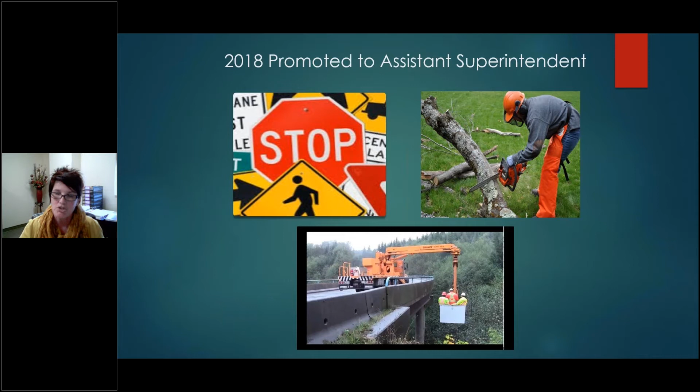I've got all of these departments, these organizations, these things that I need to do and I need to learn, but I don't know nothing about no stinking bridges, and I remember saying that. So what do I do? Where do I go? How do I find resources?

Which is exactly what Travis was talking to us about - how do we find those resources? And as you can tell, I'm not an engineer. I grew up through the ranks. I'm more of a communications and HR type person. Through fate, whatever you want to call it, I wound up at a county municipality and worked my way up into this position.

Well, there is a saving grace for me, and for me it was our lovely LTAP, our Indiana LTAP. I have to give Pat a lot of credit, and I have to give LTAP a lot of credit here. They actually took me under their wing, if you will, and tried to show me the ropes. One of the great things Pat did for me was he actually invited me to this lovely thing down in Florida.

Florida was the actual ploy for me. Hey, you want to go to Florida and learn about bridge preservation? Sign me up, Pat, I'm there. So for me, I got to go to this TSP2 National Bridge Preservation Conference.

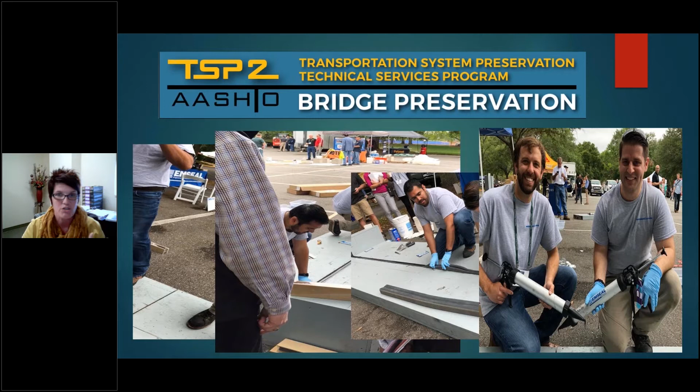One of the things that I loved about this conference is I'm very much a visual learner. I'm very much a hands-on person. As you can see, just look at some of the slides that we had. There was a day where we did nothing but demonstrations. For any of you that have been to that program, you know how valuable that can be for you - the things that you get to experience, the things that you get to see.

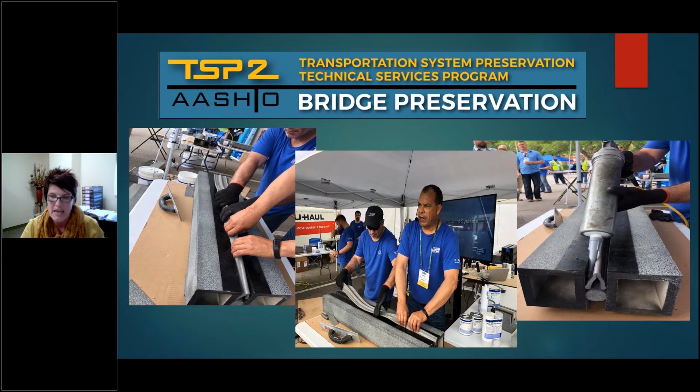Another thing that Travis talked about was that these things didn't take a lot of hands-on, they didn't take a full crew for you to actually do. You could do this with a very small crew. For us, we have 2 people in our crew, so that was a real important factor for me. What are these things that we can do out in the field, and how can we take care of these without actually hiring a contractor? Is it so many steps or so much technology or so many products involved that we can't handle that?

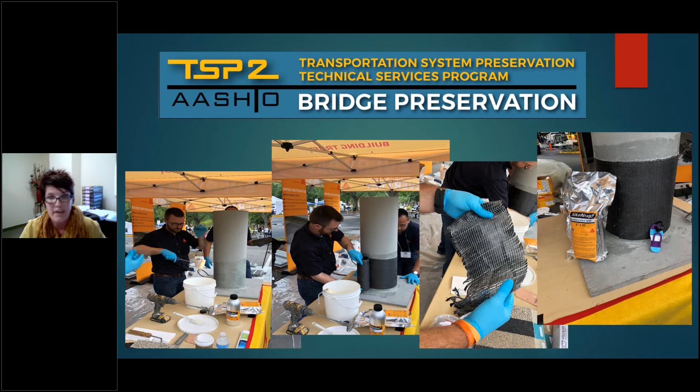Some of the things that I learned from that conference were that there were things that my 2 crewmen could do, and that made me very happy. So I brought some of that stuff back. I was very appreciative to go to that conference and learn some of the things that I had actually learned. Another thing that actually helped me was I was also and had been involved in some of our programs that are given by LTAP.

We just finished not too long ago, a couple of weeks ago I believe, we actually had our bridge conference. We had to have it virtual, but we did have our conference this year. Last year, I actually got to present at our conference.

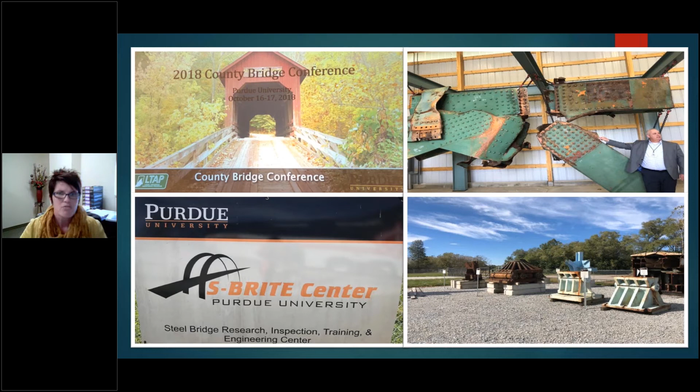In 2018, I went to the conference at Purdue University. One of the things that we did was go on site to the S-BRITE Center, and we got to look at some of the old bridges and what went wrong, what might have failed, and some of the testing they'd done on those things. That's just soaking up information and learning, because to begin, you just have to begin.

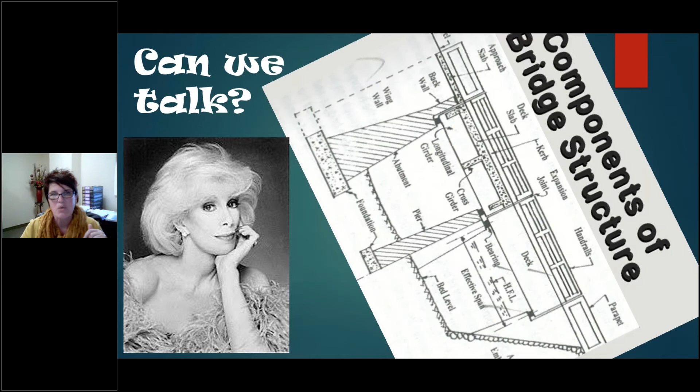But that's easy for other people to say. I didn't really know what to do or how to do it. So I'm a talker, and I said, can we talk? One of the things I wanted to talk about was the components of the bridge structure. I wanted to learn about the bridge and the structure.

So you have to start somewhere. Some of the things I had to do was go out and look at a deck, look at the wing walls, the approaches, the handrail—some of those simple things people don't always think about. I had to go out and familiarize myself with some of that stuff, and was very successful, I might say.

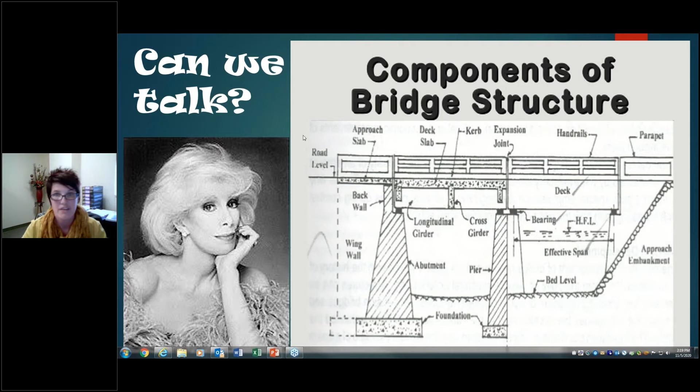We learned a lot. I also had to learn about the resources available to me. LTAP is a resource, and they are more than willing to help you. If you're not using your LTAP in your state, reach out to them. I'm sure they would be willing to help you.

But we also have this lovely thing—I have it right here in my office—that lovely bridge inspection report. Most of us have those bridge inspection reports, and it's a huge, thick book, sometimes of what we might think is nothing. But there's valuable information in that book, and the contractors and vendors that help you put it together—for us, for this project, it was American Structure Point.

My latest bridge vendors and contractors are United Consulting. They've been great with me. I ask them all kinds of questions all day long.

From this report—this isn't the current one, it's the previous one, but that's when I started—I created what I call the list. Now, the list is a four-letter word. It was actually about 284 items. As you can see, I'm a color-coded kind of person, so I color-coded some of the problems, issues, concerns, or repairs needed, or how they were listed. I just couldn't believe we had 284 items. I was dumbfounded.

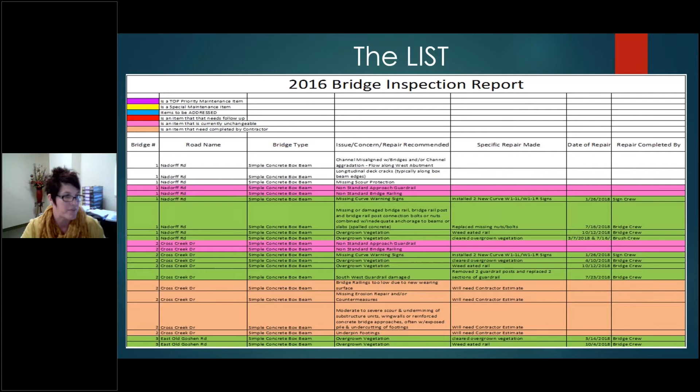I started with some of the basics, which is also what Travis was talking about: deck cleaning, sweeping, washing, seals and joints, the vegetation—is there grass, is there brush—the guardrail, the bolts and the posts. Very important things we don't even think we look at, but those can actually help us maintain our bridges and their appearance.

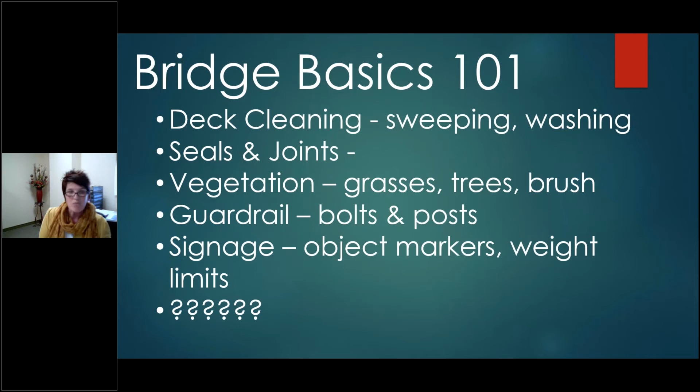I actually had the pleasure of meeting Tim at the bridge conference I got to go to in Florida, the National Bridge Conference. One of the things Tim was doing was a demonstration—he was talking about silane, and I actually fell in love with this product. Well, he did me one better.

I not only fell in love with the product, but he told me—and Pat had set this up as well—that because some of the locals from Indiana had come down to this conference, they were going to set up a teach-and-learn demo for us and some of our surrounding counties. So Tim brought his product out for us, made us pick out a bridge, showed us how to use it, and then allowed us to use it.

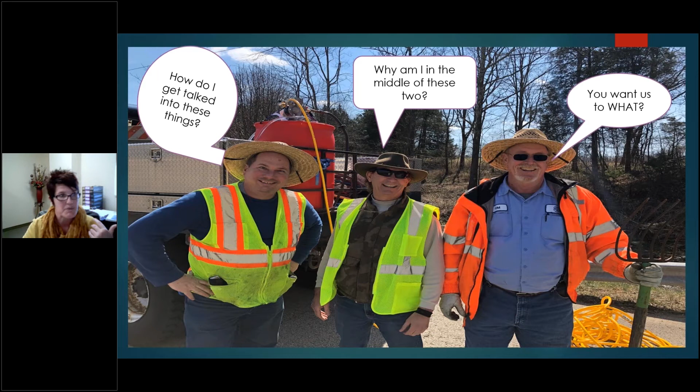This was very, very helpful to us, because sometimes you don't know how to eat an elephant—well, what's the saying? You eat it one bite at a time. And that's exactly what we started to do, is we started to eat this elephant of bridge preservation, if you will. So as I said before, another wonderful resource you have is your contractors, your vendors.

They are there for you. Ask them questions, ask for products, ask for samples. See if you can watch them work. One of the best ways that I have learned, again I've said it before, I'm a visual learner.

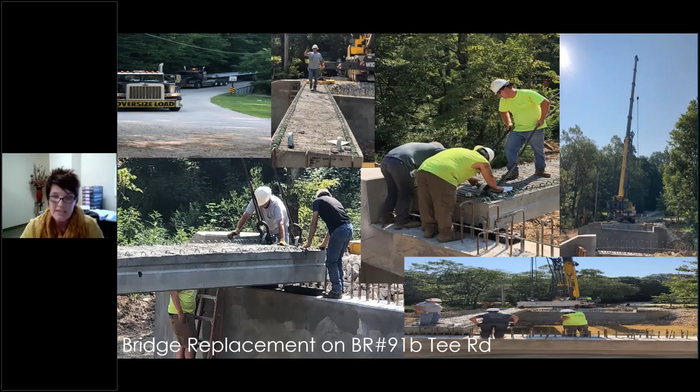So I like to go out on the job and ask questions of the people who have the knowledge. One thing we did was a complete bridge replacement on Bridge 91b on Tee Road for us. Our contractor was willing to let us go out. We got to see the beams being brought in and set, and we got to ask a lot of questions that day, which I really appreciated.

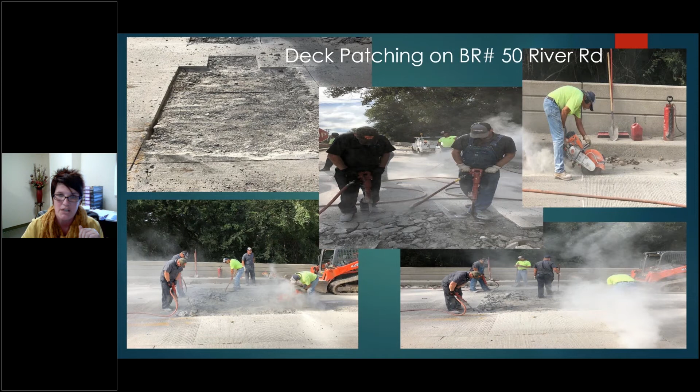Another thing we got to watch was deck patching, we did a few of those. Our contractor let us be out there watching them jackhammer and cut. Very, very helpful process. Another thing I got to learn was from the contractor, who is an engineer from CNR Construction.

He let me go out and chain a deck. I don't know if any of you have ever chained a deck before. I know that's a little old school, but it's very valuable. I likened it to hanging a picture and knocking on the wall looking for a stud - when you hit the stud it makes a different sound. Well, when concrete is delaminating, it makes a very obvious different sound. That was a valuable tool for us.

There are other, more expensive ways to do that, but if you don't have the funds, this is something you can do in-house. You can take a chain and drag it across a bridge deck.

One of the other things we talked about is seal replacement, joint replacement. Here's a couple of pictures of the actual contractor doing this for us. We've actually started doing some of this ourselves this year - I'll talk about that a little later.

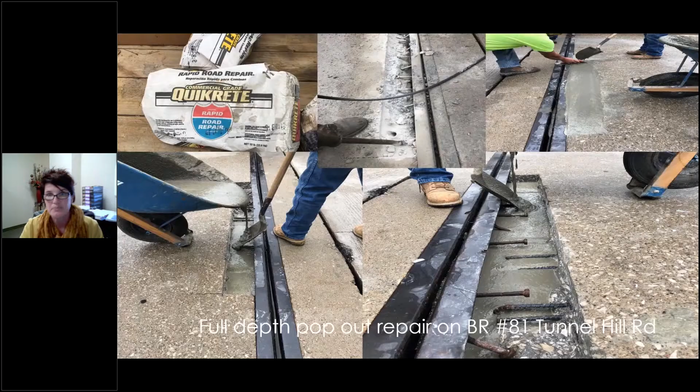Another thing we did - here was a complete cutout on one of our joints. As you can see, we had to cut it completely out. We did some ready mix concrete and poured that back in. That was another thing we did.

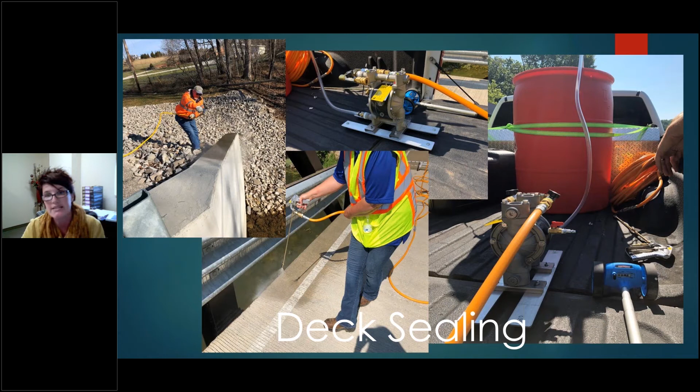This is Tom, my bridge crew coordinator, doing it, with some gentlemen watching him behind. And this is a picture of me - they like to catch me working when they can.

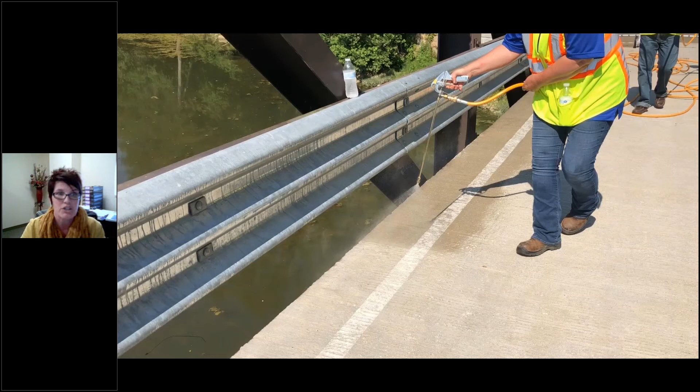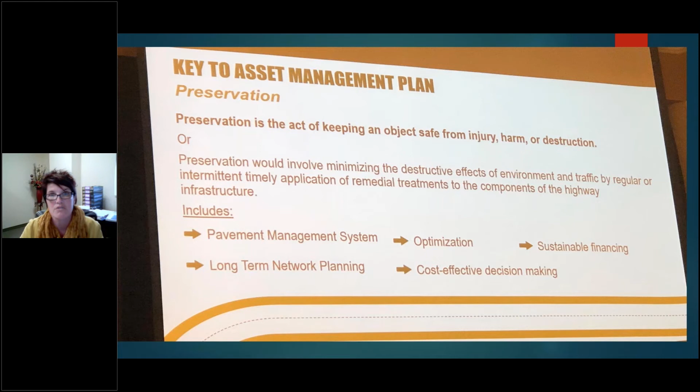So when we talk about preservation, we're talking about doing those minimal things to minimize destructive effects of environment and traffic. And we can do those - all of us can do those. You can do that with your smallest crew. Again, I have two people.

We talk about strategy, and I believe part of asset management - Travis talked about it as well - is you need to have strategy. I totally agree with that. But culture eats strategy for breakfast, and here's why: if you don't have a culture of preservation, or a mindset of preservation, you'll never begin the strategy in order to have that preservation.

And I think that that's very important. So you have to build that culture so that you can continue with that strategy.

One of the things we wanted to start doing was our own bridge inspections. We have a third party doing this for us, and they're the experts. We don't want to take away from them, but how do we know what we need if we don't do it ourselves? Here's our current bridge inspection report.

Again, this is from United Consulting, our current contractor and vendor. We're in our second phase now - we began phase 1 in 2018. This is a picture of Jim, who is my direct contact, and our guys going out actually looking at some of the problems on our bridges.

As you can see, we got a lot of rust and deterioration on that rocker plate there. We were concerned about that, and we wanted him to look at that for us and give us his opinion. Again, use your vendors - they're there to help you. That's what you pay them for, quite honestly.

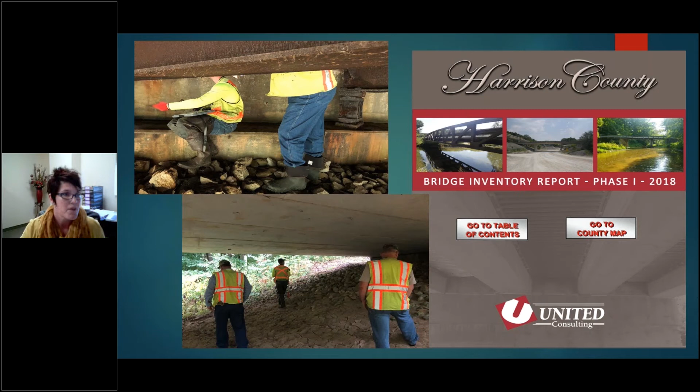So here's some things we've actually seen when doing bridge inspections. Maybe you've seen some of these things, maybe you haven't. We have a lot of farmers and a lot of people that like to attach their fencing to our bridges, to our guardrail. They attach it wherever they can get it, or they put up their little cattle fence, and then they cause drift to be caught, which causes us a problem as far as the channel and flow are concerned for our bridge.

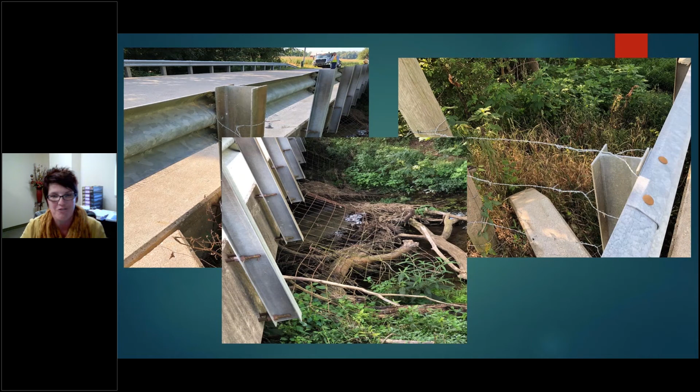Again, you've seen this picture - this was something we actually looked at. This is deterioration all the way through, it goes all the way down. So that's something we want to notice.

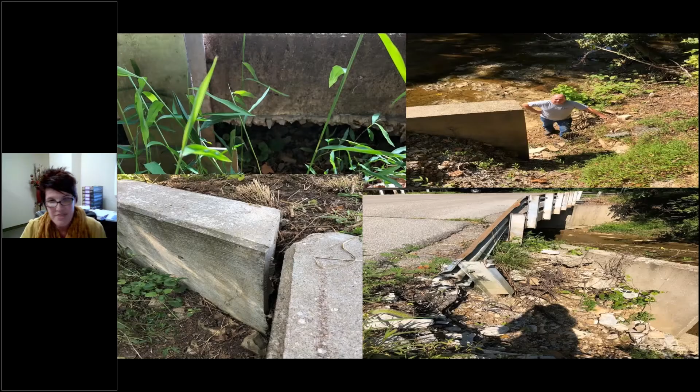We don't want to just wait for a bridge inspection every 2 years to see that and to see what we need. This was, again, water and the environment - elements aren't always your friend. Salt is not your friend when you're talking about preservation and maintaining a good quality bridge. There's some damage here in the lower right corner to the guardrail, and of course some deterioration, obviously.

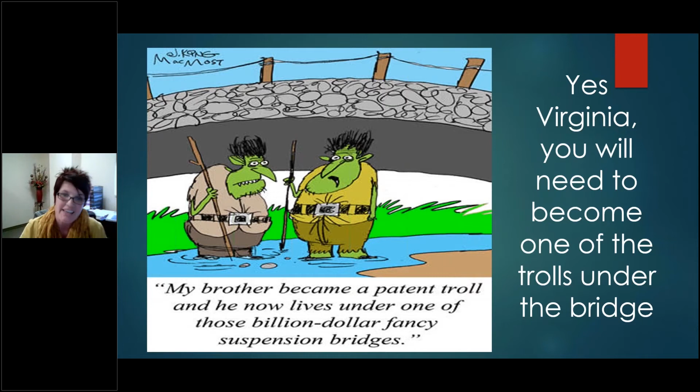So our guys joke around, and they have said that they are the trolls underneath the bridge. And so we always say, yes, Virginia, you will need to become one of the trolls under the bridge.

One of the other things they've noticed - just some more things they've seen as they've become better inspectors - is, again, the deterioration of the actual metal on the rocker plates. This is a bridge we're trying to take care of right now; we know it's a problem. This one we've already taken care of. The guys noticed this and let us know about it. As you can see, there's exposed rebar and a crack all the way down on one of the box beams.

Some of the things we have started to do are small things, little things, and these little things matter. I would tell you that sometimes the smaller things actually matter more than the large things, because that's what's going to help you keep those good bridges good for a longer period of time.

So we asked if we could have an agreement to rent their snooper after they use it, because sometimes those come from states away and we don't always have the ability to get those. So when we do the inspections, we put that on our calendar and go ahead and do a cleaning process of cleaning these trusses out.

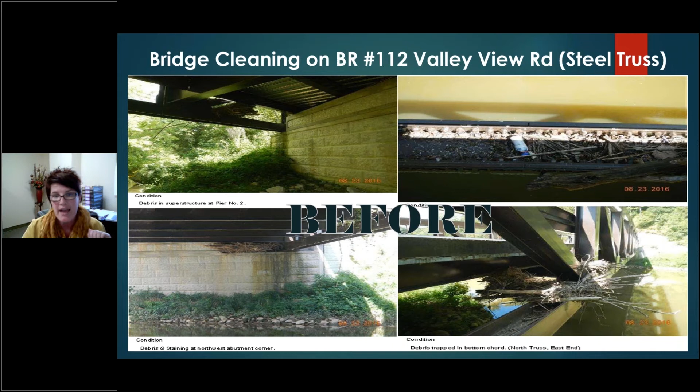This time it was much cleaner. It was not such a big job for us to have to do this, and that was just because we took the time to do it the first time.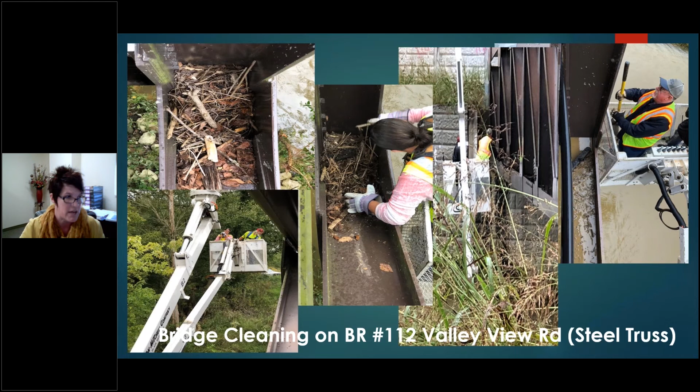One of the things that we've learned is that sweeping and cleaning the bridge decks really helps prevent undue wear and tear on those surfaces. It helps with the retention of moisture, allowing all the parts of the bridge to work properly, for example the drains. We do wash our bridges regularly now. The guys just finished their annual wash, if you will.

We have a hydrovac, a high pressure washer, and we go out every season now. We map out what we're gonna start with, and then we just work our way through, depending upon weather and those things. That's something we do annually now. We started that in 2018.

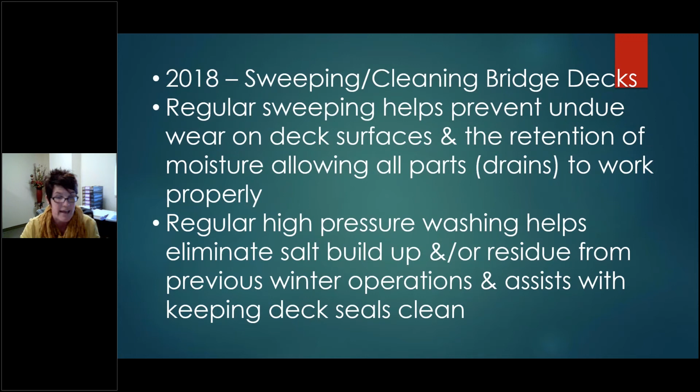Another thing that we have noticed a lot of is we have a lot of damage on our guardrails, unfortunately. I hate to say it, but a lot of times we're very rural, and we have a lot of tractors, a lot of farm equipment, and people that run off the road not paying attention. As you can see right here, here's a picture of some damaged guardrail.

Before, we would normally contract this out, but what we've tried to start doing is make my guys a little more responsible and give them some opportunities to prove themselves. And believe it or not, they've done an excellent job. I can't brag on them enough.

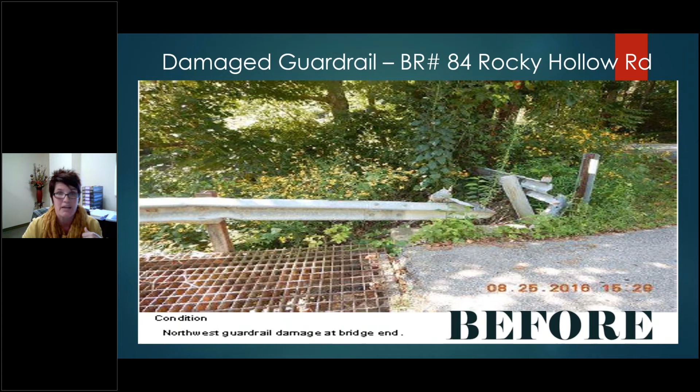That was the before. As you can see, this is the after. This was on one of our bridges, and they actually did this all on their own. They took one of the flared ends, took one of the segments, put it together, and were able to fix that. So very, very low cost for us.

You have to be able to inspect some of this guardrail. A lot of times what we found is a lot of the bolts come loose, just because of regular vibration. Sometimes they slip off, sometimes I think they're taken off or stolen, but they need to be replaced or tightened. So you need to be able to do that.

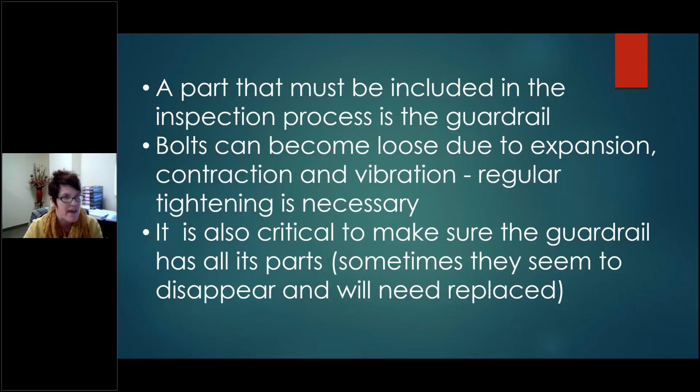In 2018, we actually started the deck sealing program. We had that first demonstration, and from that demonstration we bought 2 barrels of product. We went through those 2 barrels, and this year I can tell you that we went from 2 barrels to 4 barrels. We started at 2 and we doubled our usage already.

We are trying to work it out where we do our entire inventory of bridges that are concrete, that have concrete deck and don't have an overlay on them. As far as asphalt, we do have a few that have an asphalt overlay. We're trying to do those in a 5 to 6 year cycle. We'd like to get them in 5 years, but sometimes money doesn't allow you to do that.

Now, this is something that's very, very inexpensive. We've got 2 men doing the actual work. You may need a flagger or 2. We're a little, as Pat had said, very lucky. Some of our roads are more rural, so we don't get a lot of traffic on them. The 2 men can actually, one can do the flagging and one can do the actual sealing. So that's something we've been very, very lucky with.

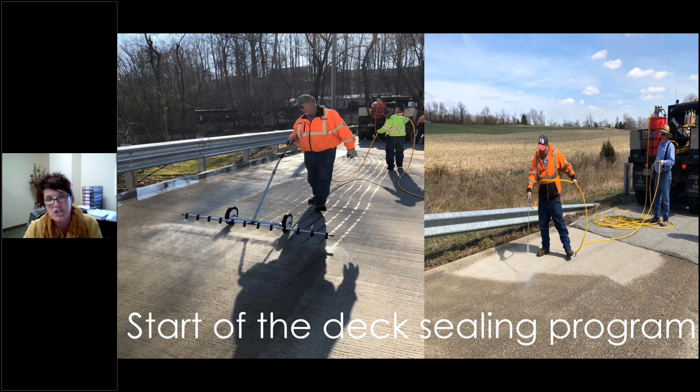And we actually finished our sealing for this year, and we did finish it with 4 barrels. So next year we'll start fresh again. This slide is just telling you what we were trying to do, what I just told you we were doing.

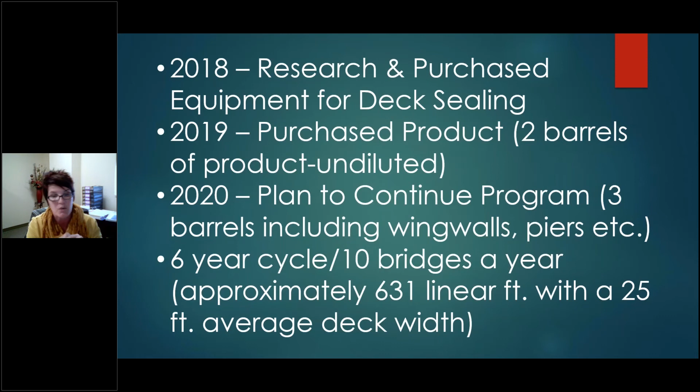We actually inherited a few more bridges. So we did have 77, we now have 87. And so we were doing a 6 year cycle, 10 bridges a year, approximately 631 linear feet, with a 25-foot average deck width for us.

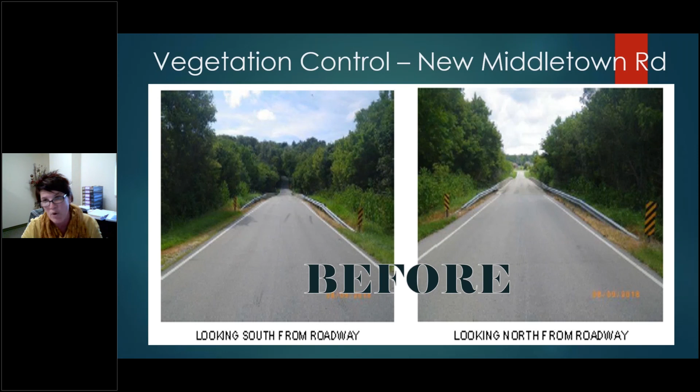Vegetation, I can't talk about this enough. We joke because we say the Toms' favorite color is brown, and it's very true. One of the things that can happen with bridges, especially in local areas, is the canopy can develop, or you don't take care of your guardrail, and then you have a lot of problems and issues, because that will help retain water and moisture, which are things we don't want. So here's the before and here's the after, if you can see how nice and trimmed up that is and how much better it looks.

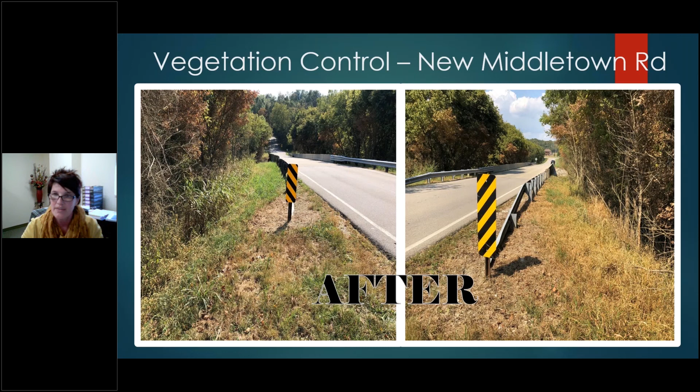Another thing that we have is what I was talking about, the canopy. As you can see, some of your trees and leaves are actually going over the road. When the leaves fall, they just sit there on the road if you don't sweep those off.

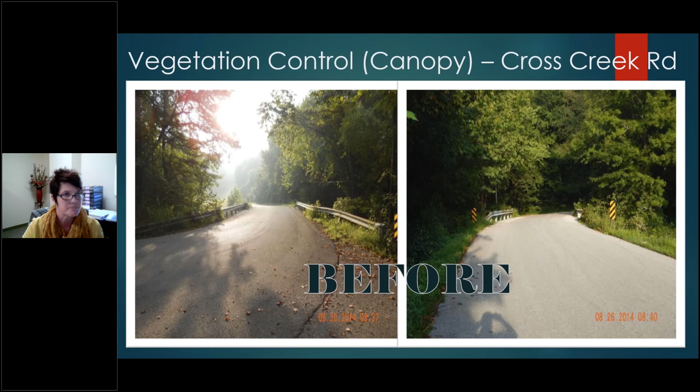So they actually don't help your bridge deck at all. This was a before photo - we joke because we've had the trees there so long that they've grown into the poles. This is the after. You can see it's much more open.

They got rid of a lot of that canopy, and that's really helped. We want to continue with that. We've been working with our brush crew, our sign crews, trying to get a county-wide herbicide program that includes all of that vegetation, the brush. We have identified our worst bridges. If we need to, we will get an outside contractor, because we currently don't have a bucket truck, but we just do that as needed.

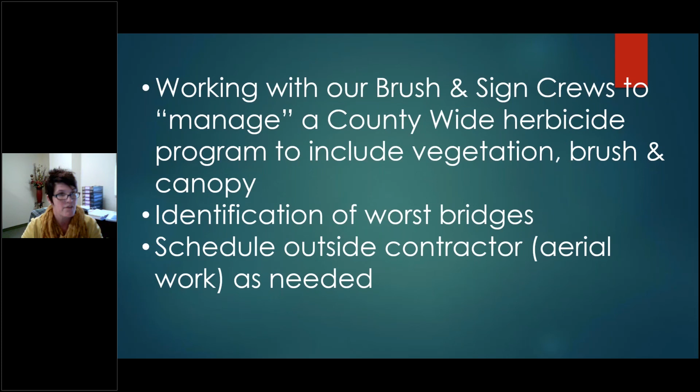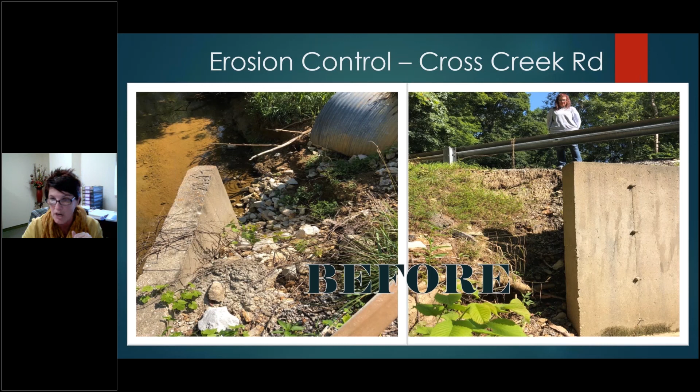Another thing that we keep talking about is erosion control. This is actually one of our bridges, and we have this everywhere. The riprap has just been taken away, washed away. My crew actually, they've laid hundreds of tons of riprap, and a lot of it has honestly been placed there by hand, just because the machines that we have, there wasn't an ability with the way the bridges were and the way the roads were to get that to the places that they needed.

We actually had built some of our own cages and put some of those in so that we could have the walls built up and take care of that for ourselves. This was an effort that was done by all of us - the district crews helped along with the bridge crew, the brush crew, the sign crew. So this took a little more manpower, but it is doable.

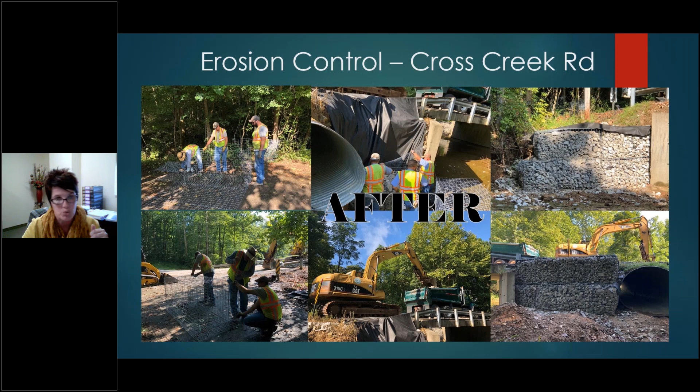There were 4 bridges that were in need of major erosion control work. We worked with the district foremen and we completed this. And like I said, we got those up. It was really nice to see that done and checked off of the list.

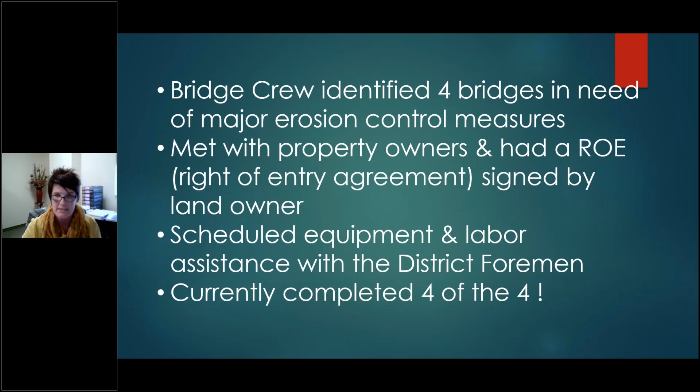When we talk about preservation and what you're looking for, what should you be looking for? What does your future look like? Well, you should see bridges. It's real simple - you should see bridges.

We talk about the difference between being reactive and proactive. One of the things that we have done, and Travis actually mentioned this, he was talking about all of those lovely forms that would help you with bridge inspection, bridge cleaning. And what I like to say is I'm a former trainer, so I'm saying steal with pride.

One of the things we stole with pride is we created our own bridge inspection form, and I have one right here as well. I know we pay someone to go out and look at our bridges every 2 years, but I have 2 gentlemen who will go out and look at their bridges because they have ownership of those bridges. They'll tell me if their wing walls are good, fair, or poor. They'll tell me if their deck is in good, fair, or poor condition. They'll tell me if the seals are good, fair, or poor. They'll do that and then give us an overall rating and list any problems or concerns they have, and we'll have a conversation about that. I think that has helped us a great deal, because we're using our own resources for bridge inspection.

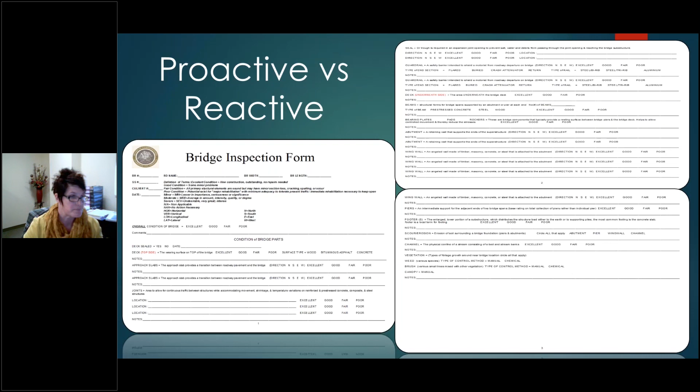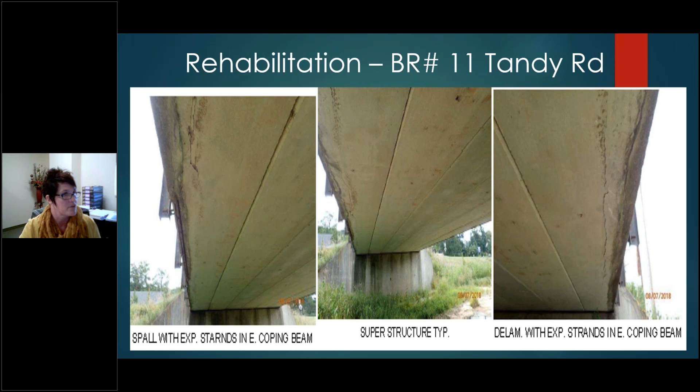We've had a lot of major projects, and that's another thing Travis was talking about - you have to prioritize, right? Are you going to do the simple things you can take care of, or try to do some of the more major things? And if you're going to do them, how are you going to do them? We're lucky we've been able to have a little bit of our own funding available so we could do some of those projects. Here's just a few - I'll go through those really quickly for you. That was one of them, Tandy.

So my question for you as an owner, what are you going to choose? Are you going to choose reactive and wait until your car is completely empty, as Travis said, or are you going to be proactive, and when you see that the fuel gauge is in the middle, go ahead and get gas? We're trying diligently with the help of people like LTAP, our vendors and our contractors, to be more proactive, and we challenge you to do the same as well.

What questions do you have for me?